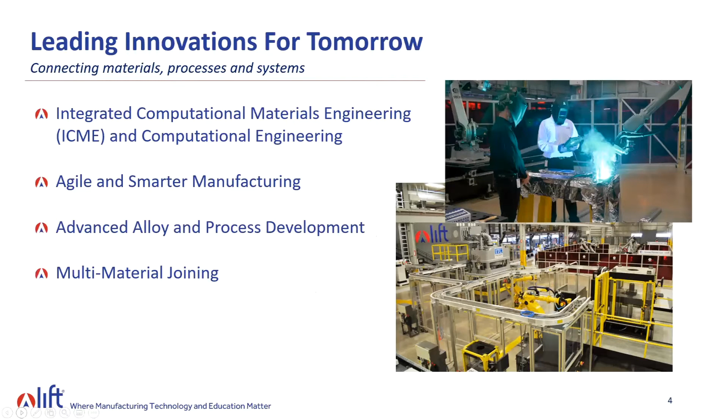So we have two programs at LIFT tackling this. The first is our technology program called Leading Innovations for Tomorrow. The second is our talent program, Learning Innovations for Tomorrow. We'll get into both in just a second. Leading Innovations for Tomorrow is the technology program, where we are doing the work of connecting materials, processes, and systems via these four pillars that you see on the screen here. This is where most of our work resides, from digital analysis and computation to actually doing the work of joining and developing products and implementing them into the systems.

On the talent side of the equation, Learning Innovations for Tomorrow, we are innovative there as well, creating new tools, pathways, and venues. It really revolves around our Ignite Mastering Manufacturing curriculum that we developed with funding from the Department of Defense, to help expose high school students mostly to the world of advanced manufacturing, because we want to make sure the pipeline of talent for advanced manufacturing in the future exists and is robust.

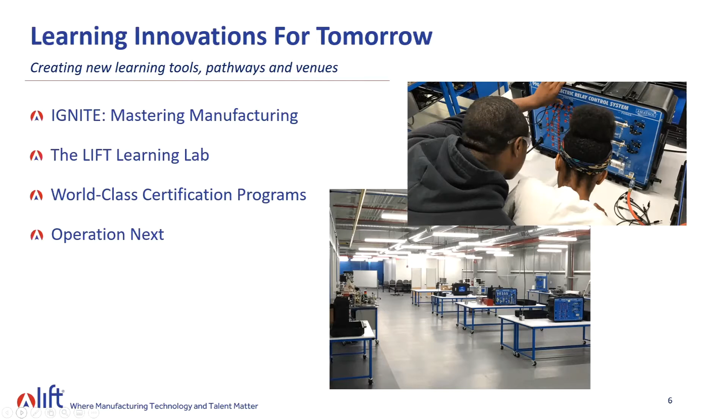We know there is a skills gap where 2.4 million jobs over the next 10 years will go unfilled because there are not enough people to take the jobs that are available or will become open over that time. So we want to make sure we are encouraging folks to look at advanced manufacturing as a career, and we do that in our facility at our LIFT Learning Lab that you see pictured there. Pre-COVID, we had about 120 students any given day coming through our facility to learn about advanced manufacturing or take part in our world-class certification programs. We are certifying people for jobs of today. We are concerned about the jobs of the future, but we are certainly working to help folks find the jobs available today in welding, CNC, robotics, industrial technology maintenance, which takes us to Operation Next.

Operation Next is one of the programs that we are most proud of here at LIFT.

It started as a program to help our separating servicemen and women who are leaving the military. Six months before they leave, it gives them the opportunity, while still on active duty, to earn certifications in some of the most in-demand advanced manufacturing jobs: welding, CNC, robotics, etc. That has been successful, and we are working towards expanding that across the country.

We have funding from the Department of Defense to do just that. It launched as a pilot back in 2018 at Fort Campbell, Kentucky, but has since expanded to the Michigan National Guard, and their spouses can take advantage of the program, as well as the Florida National Guard and Reserve and their spouses. We are looking to make some announcements coming up still this year about more defense facilities where this program will be expanded.

It also was expanded into industry in response to the COVID-19 pandemic and the CARES Act, which was funded and passed by Congress and signed by the president last year. We are piloting taking it into industry here in Detroit, as well as Pittsburgh, to help displaced workers and small to medium-sized manufacturers get off the mat, if you will, after the pandemic and really regain their footing as the economy recovers.

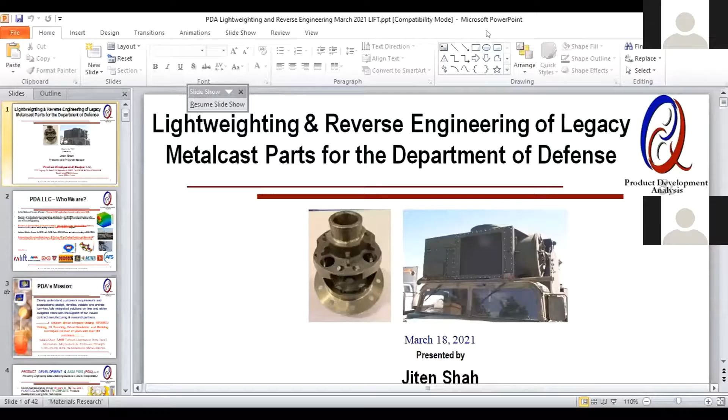Great, can you see it okay? Yes, we got it, thank you.

Excellent. Yes, hello everyone, good morning or good afternoon depending upon where you are. I'm Jiten Shah, founder and president of Product Development and Analysis, PDA LLC.

These two topics, lightweighting and legacy parts—I liked what Lift calls them, the orphan or the obsolescence—these are the two top priorities of the Department of Defense, mainly for sustainment and operational efficiency. We have done extensive work in these two areas, so I thought we would share and trigger some interest and some provoking thought process.

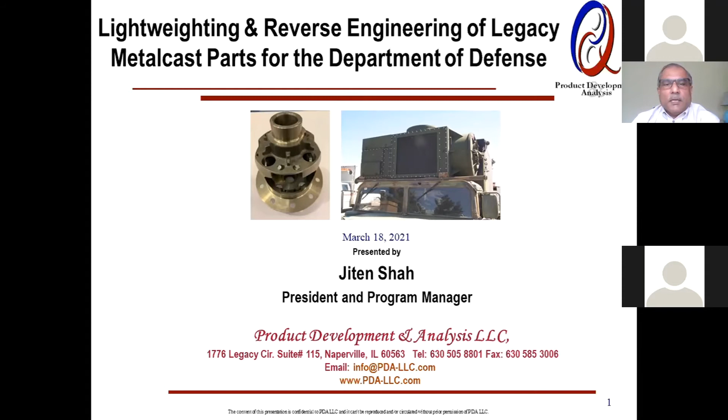Quick background on PDA: we have been serving metal casting since '93, over 27 years, with over 165 OEMs and casters in military and transportation. In addition to Lift, we have been a member with contract research projects with America Makes and MXD.

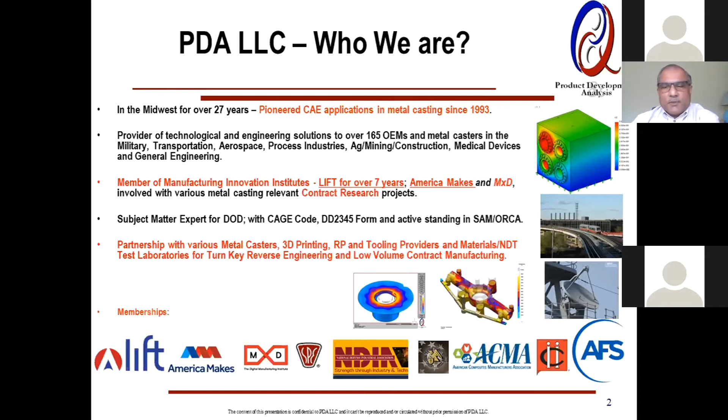And we provide a turnkey solution. We are widely engaged with professional societies like the American Foundry Society and the Investment Casting Institute. What we do is clearly understand the requirements and expectations and come up with a fully integrated solution, essentially utilizing state-of-the-art technologies, whether it's virtual simulation, ICME, 3D scanning, or additive manufacturing.

We have also done quite a bit of conversion for the lightweighting objective, converting a lot of fabrications and forgings into castings in different alloys. And I was just adding up—I think we have added over 3,000 tons of castings to the casting industry.

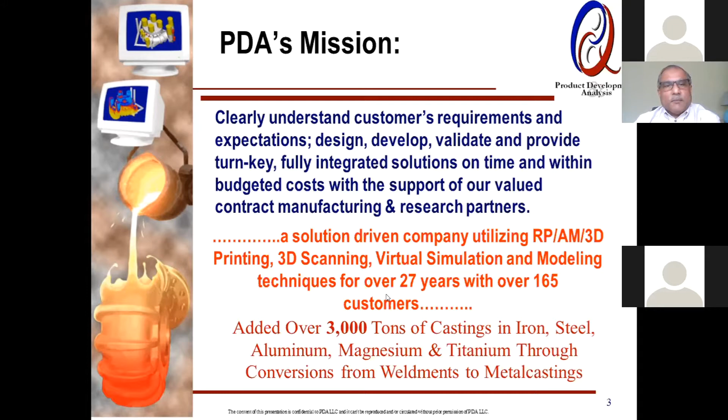In addition to metal, we also do plastic composite and essentially new product development, reverse engineering—which is what I'll talk about—redesign, and we do get into some failure analysis, which leads us into reverse engineering. I have a couple of case studies on that.

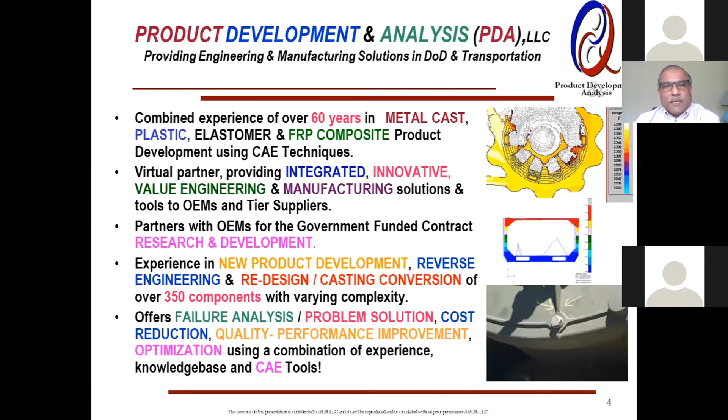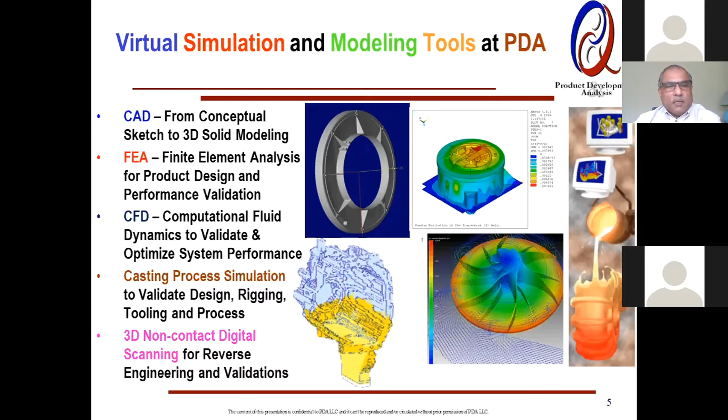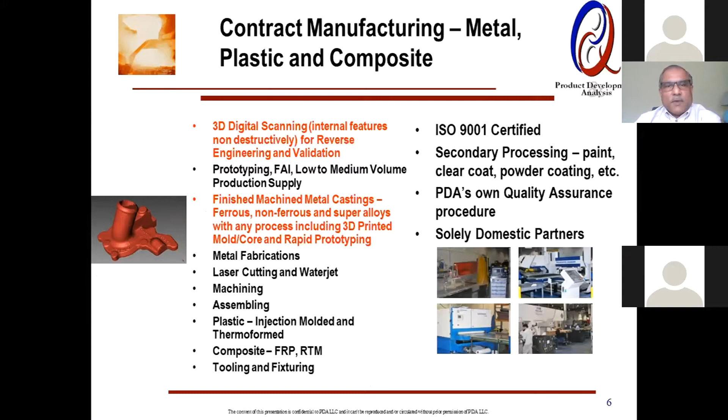In terms of tools, we have obviously a couple of CAD packages, FEA, quite extensive CFD, and our core competencies on casting process simulation, which I'll dabble a little bit deeper into, and then 3D scanning, non-contact. And as I said, we do turnkey, so we do contract manufacturing and provide components—you will see that too in a minute.

I've been involved in new product development using either rapid prototyping or additive manufacturing. Another thing I'd point out here is we extensively work in a collaborative environment. We are not the manufacturer, so we have partners we work with, and our OEM customers, we all collaborate, go through negotiation, keeping our ultimate goal in mind, which could be either weight reduction.

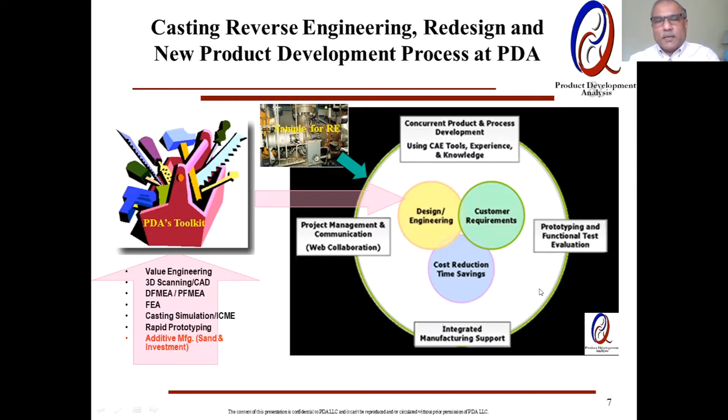Typical inputs we get, the key ones are the customer requirements, goals, expectations. In case of reverse engineering, we get a sample which could be broken or brand new, and that becomes our input, and we get into developing the shape, optimizing the shape, and developing the risering and the gating, the whole plumbing system, simulating with process parameters in mind applicable for that particular component.

And then after we have met our targets, we get into launching and deploying the technical data package, which could be the 3D models, drawings, and a bunch of reports.

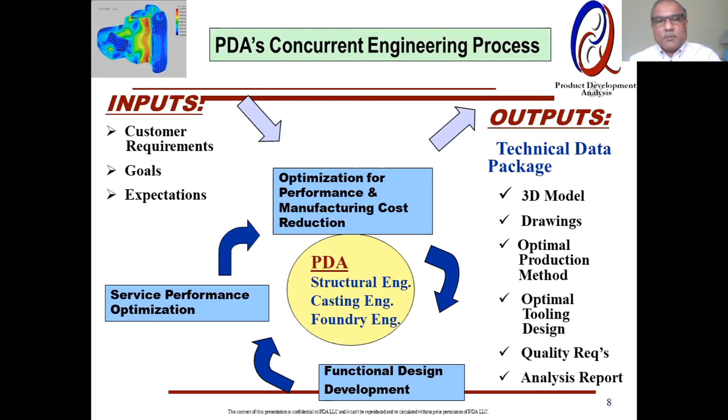This is our core competency, metal casting. That's how I started the company in '93. We have tremendous experience and database for various processes and alloys, as you can see here, anywhere from titanium.

We did for Rock Island Arsenal, investment cast for aerospace, to a stationary power generation oil pan about 12 feet long, a huge component, and some valve bodies for naval or marine applications.

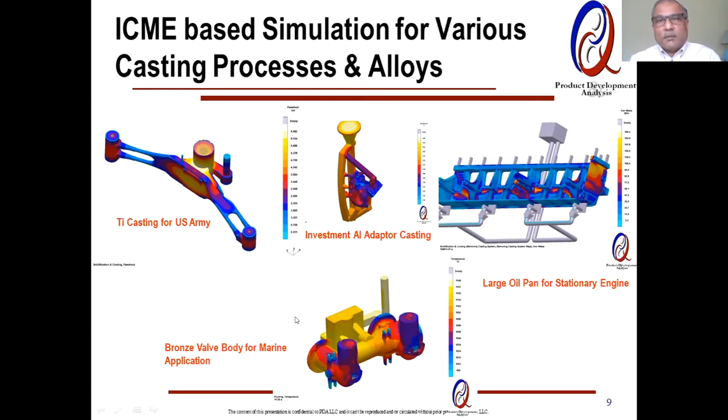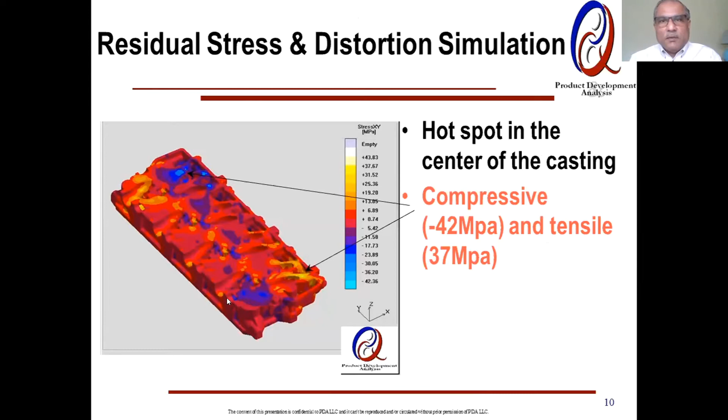When we talk about advanced simulation capabilities, the technology really comes in handy, especially when dealing with lightweight, thin wall components. There's always a concern with distortion and the buildup of residual stresses. So we have that capability, and we've done a series of projects.

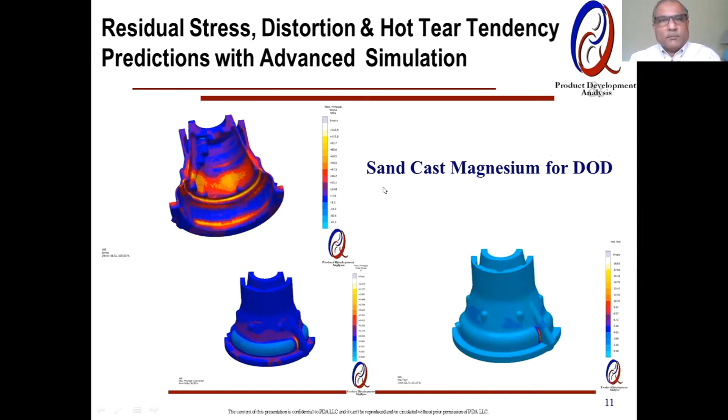This is an example of a magnesium housing for an aircraft gearbox. So lightweighting essentially is for improving the performance, efficiency, or payload, and has tremendous applications.

One I would consider is while you're at the new product development stage. In the old days we used to design quickly and then come back and optimize. Well, now the trend is to do your best right from the get-go and go through design optimization before you launch a new product. So lightweighting related technologies are quite important.

And then obviously redesign, reverse engineering for optimizing the performance. And I folded my conversion scenario under reverse engineering or redesign, kind of a subset. And also conversion as a separate topic, mainly driven from the cost reduction point of view and supply chain issues.

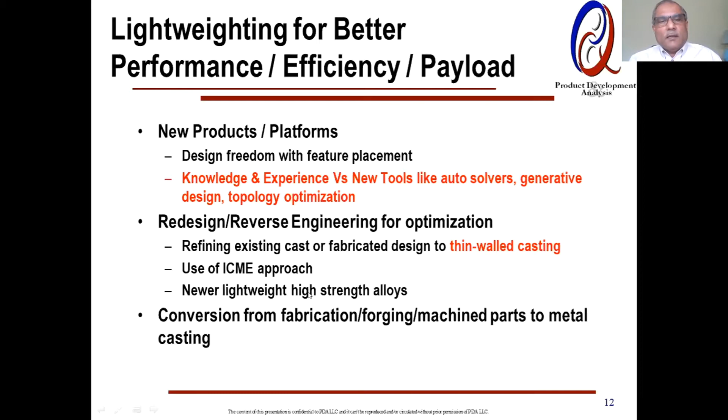We've seen quite a few examples where long lead times and the supply chain drying up necessitated looking for an alternative method, and we've converted quite a few with that.

This is one of the flagship projects I happened to be part of, where we took a legacy part used by an OEM in service for over a decade or so, and using the new alloy we developed, with design optimization, we were able to knock 40% of the weight out, and went through the whole prototyping and PPAP, low volume production, in order to get the durability testing.

We used generative design, auto topology optimization. I'd say very powerful tools, very useful to see which areas you can take the weight out. But the caution is you don't want to straight away use those outputs to try to make the castings, because you'll never be able to manufacture those consistently. So there has to be some design for manufacturability consideration, along with virtual simulation, to validate and come up with more manufacturable solutions.

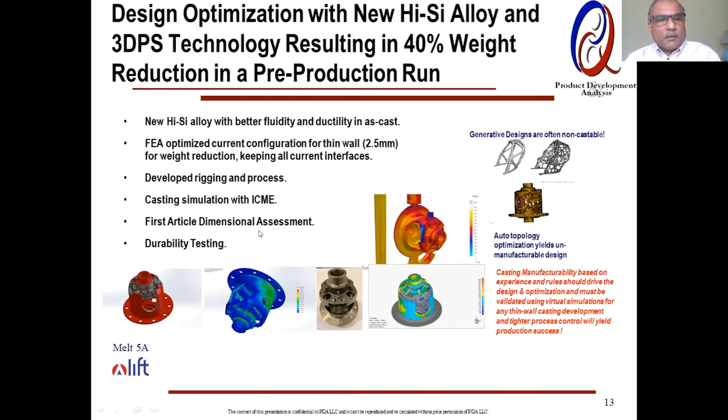The next project I was involved in was thin wall aluminum casting. These are the first 4 or 5 projects LIFT rolled out in the very first year of their existence, and we were fortunate enough to be part of it. This was led by Boeing, and it focused on thin wall casting development for aluminum alloy using high pressure die casting with a super vac.

We took a part which is the side impact beam of an automotive company, about 1.2 meters long and 3 millimeter wall. In some areas we had almost close to a 1 millimeter wall, and it was a challenge to come up with the process parameters and the gating system to make sure it fills without any hot tear or porosity in the critical areas.

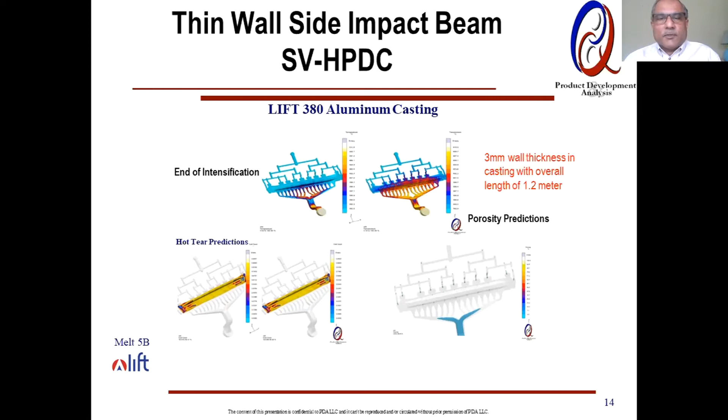So we were able to successfully simulate, and Boeing went back and validated through extensive X-ray, and they found a sound component. Also, because we were working on a new alloy, we designed and developed a fluidity die working with the Ohio State University team, where we ran trials and validated and calibrated our simulation by running partial shots in the die cast.

One thing I do talk about is what I've seen in the metal casting industry: over-specifying the component by saying, hey, I want the entire casting level 1. When you do so, you really pay a price because it's very difficult to manufacture consistently to level 1. What the suppliers end up doing is basically doing a weld repair if it's a weldable alloy, or if it's not, you end up having a high scrap rate, and ultimately the OEM ends up paying for it.

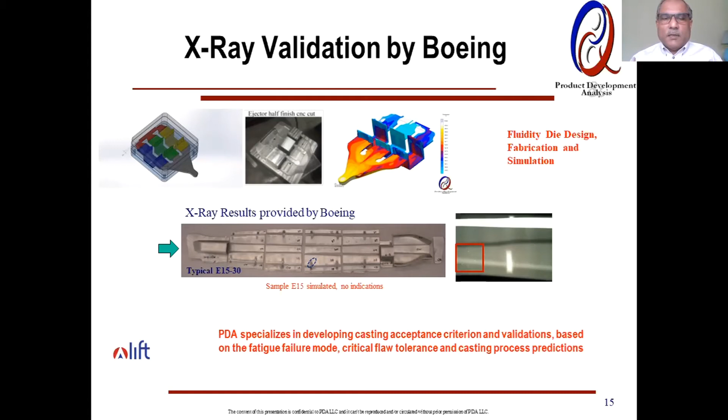So what you do now is have a casting with zoning, with different levels of severity for different types of defects. Now you are giving something to manufacturers that they can make cost effectively and consistently. So I just wanted to dwell a little bit on that.

Another exciting development, which fits in very well with reverse engineering and legacy part production, is the availability of tooling-less casting processes, using additive binder jet, where you straight away make the mold and core, or make wax-like patterns, and then do investment casting.

What we have done with this technology is literally take the tooling-related design, fabrication, manufacturing time and cost out of the equation, and the subsequent headaches of storage and maintenance of the tooling.

That's one of the key issues that the DoD, and especially DLA, runs into: they have contracts for acquisition by contract. Supplier A finishes the contract and the tooling is owned by the government. That tooling either ends up at a government depot not well maintained, and when the next order comes, they cannot find the tool, or it's been damaged because nobody really took care of it. So this is part of the issues we have with legacy part acquisitions in the DoD, especially in the DLA.

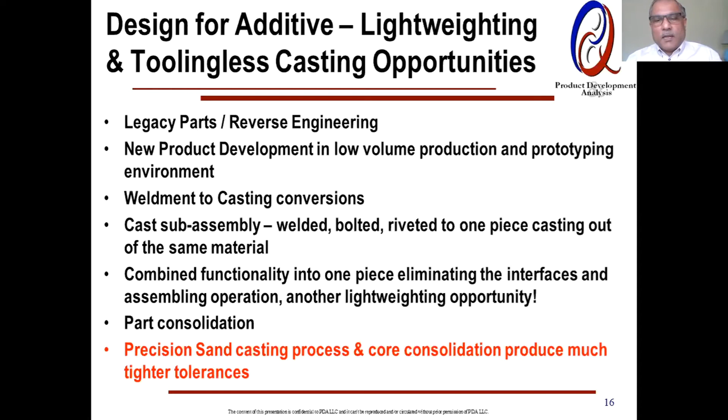Another thing we've seen with additive, especially 3D printed sand, is that these are digitally made, so there is no tooling wear and tear. Every time you make a mold, it's dimensionally accurate with a precision of maybe 0.5 millimeter. So I call it precision sand casting, because it really helps you further narrow down your tolerances, make the walls thinner, and get the light weighting.

I'm sure most of you are aware of the process, so I'll just zip through. This is making, 2-in-1 I call it, making mold and core out of the same machine without any tooling.

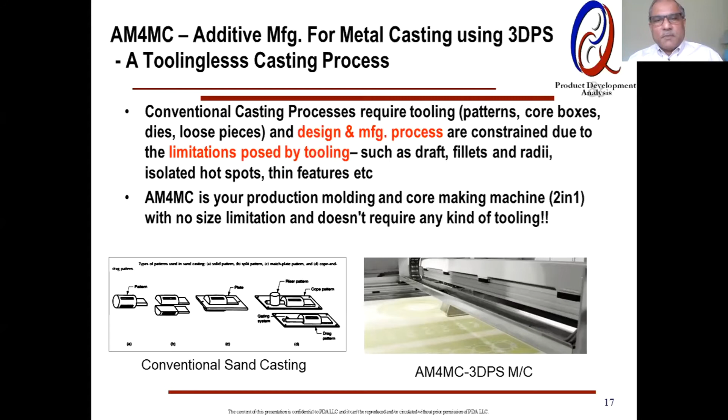On investment casting, you can see an example of a printed wax pattern that looks like an exact replica of the casting, but you are eliminating the need for wax injection dies. As the photo indicates, the storage, maintenance, and upgrade—all that logistics—is really gone out of the window.

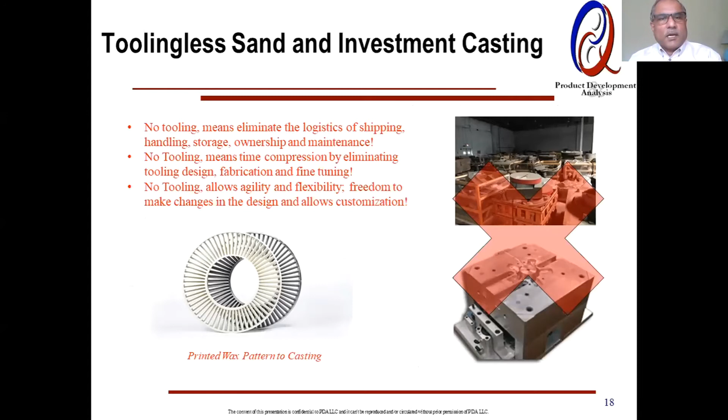One thing you also gain, since there is no tooling with this digital manufacturing, is there's no need for drafting or constraints by drafting. So it gives a lot of freedom with feature placement. You don't have to worry about withdrawing the tool out of the mold since there is no tooling, and that gives you additional advantage of putting features where you want, and gaining lightweighting and optimizing the design further.

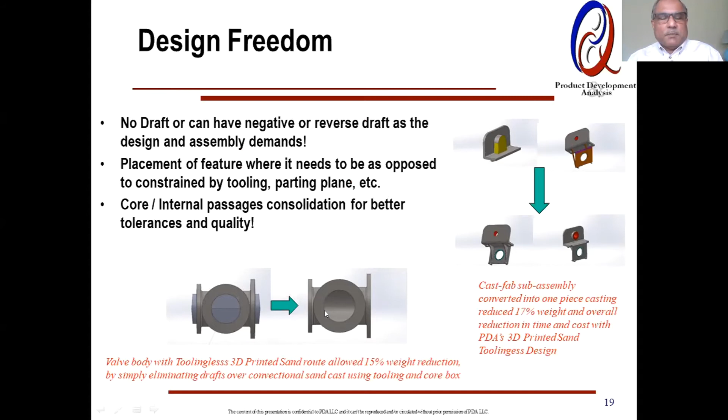Here is an example of a cast-fab sub-assembly on your right, converted into one-piece casting with a 17% weight reduction. And the one on the left, by just simply removing the draft, we were able to get about 15% weight reduction.

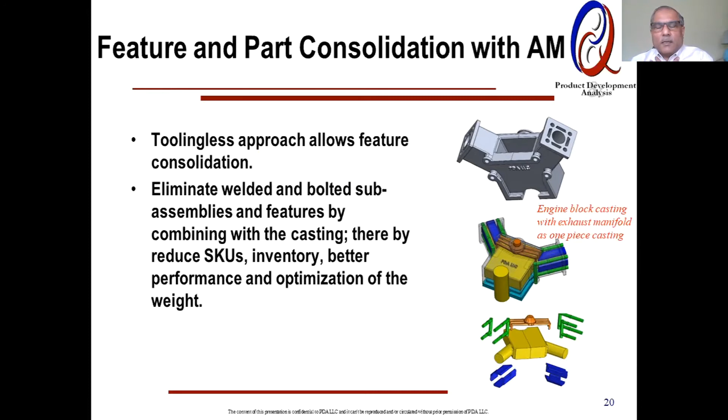Also, you can think out of the box, where you look at the current casting and how it is connected—either bolted or welded—and you can bring those features together as long as it doesn't interfere with your assembly. This gives you an opportunity to consolidate multiple components into one piece casting. For example, we worked on an engine block for a racing car where we combined the manifold with the block, coming up with a design which can only be done with this approach.

The differences here with additive manufacturing—we just have the z-axis orientation. You have to make sure your part or design is oriented properly, because otherwise you'll see a staircasing effect, since this is a layer by layer process: binder jetting.

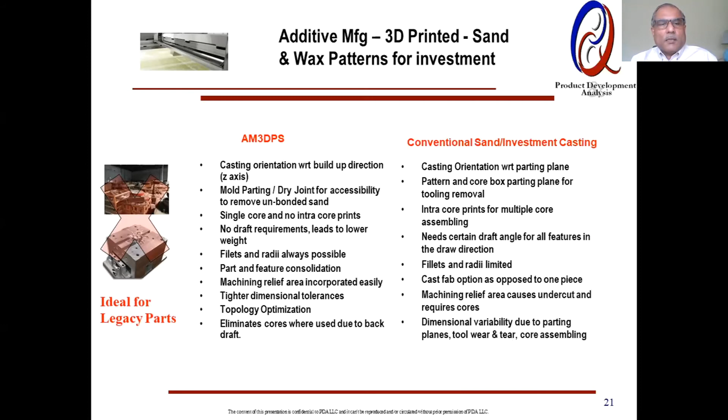It's really ideal for legacy parts. This is an example from our America Makes project with our partner Humtown, acknowledging their case study, where we took multiple cores and came up with a one-piece core design. You can imagine the positional tolerances are going to be right on the money, as opposed to the traditional approach where you may see some sloppiness because of core print clearance. This definitely gives you much better dimensional accuracy and reproducibility.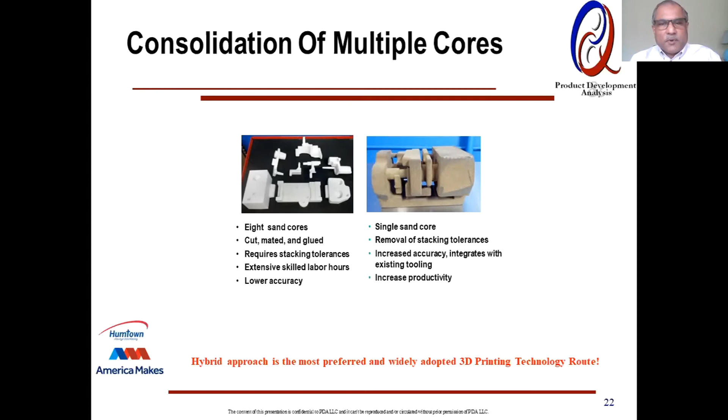Another example: core consolidation for ductile iron. This is another lift project, investment cast, where we worked with Lockheed Martin. This resulted in tremendous improvement in fatigue performance.

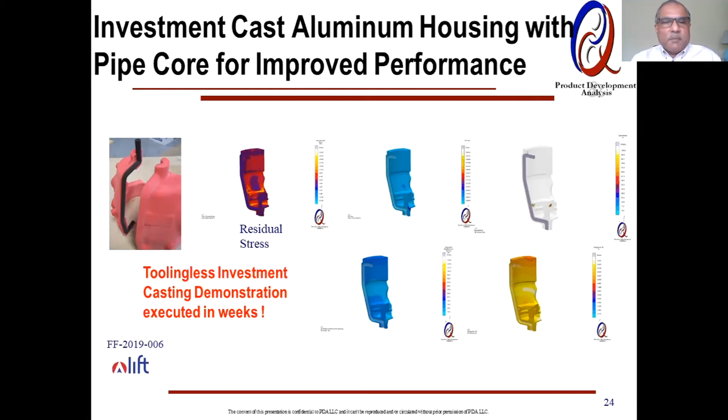Switching gears here to reverse engineering. When we do reverse engineering, typically we get new or used samples, and we always ask for access to the higher order assembly, so we know the interaction of that particular piece with other components.

Typically we scan—we have an in-house white light scanner, but we also have access to a CMM portable probe with a laser scanning attachment. We also get 2D drawings, old watermarked drawings that we can take and build into a 3D model, and then the deliverable would be a 2D drawing with engineering tolerances and fits. That's a very important area in reverse engineering, because you don't have access to the design engineer who designed this, and you have to engineer and come up with the tolerances and fits.

And of course, we then determine material quality assessment through FEA or hand calculation. We determine the critical areas and features and develop the requirements, and now you are getting ready to make castings and do the secondary processing.

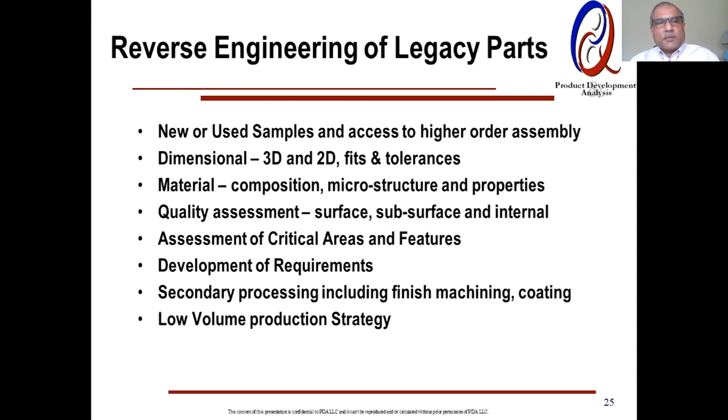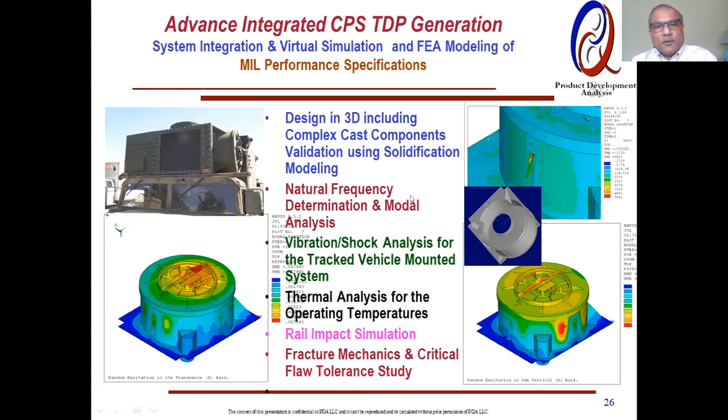This is an example of a collective protection system, Humvee mounted, that I was involved in—reverse engineered all the aluminum casting components. We had to go through extensive design validation, come up with the requirements, and deliver the data package to the Department of Defense, which they used for acquisition and sustainment.

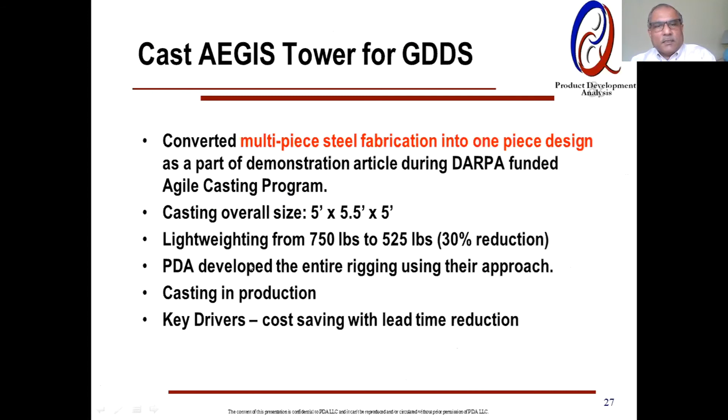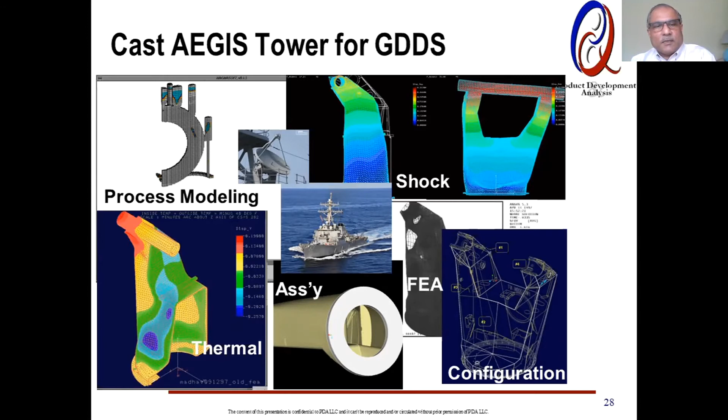Another project that comes to mind: we converted a steel fabrication into a one-piece casting design and achieved 30% weight reduction, with tremendous savings in cost and lead time. This particular component is actually still being used on the destroyer Aegis—that's the targeting radar antenna dish and the structure we designed. It's about a 5 cubic foot envelope, a pretty big sand aluminum casting that had gone through extensive FEA, rigging, and process simulation.

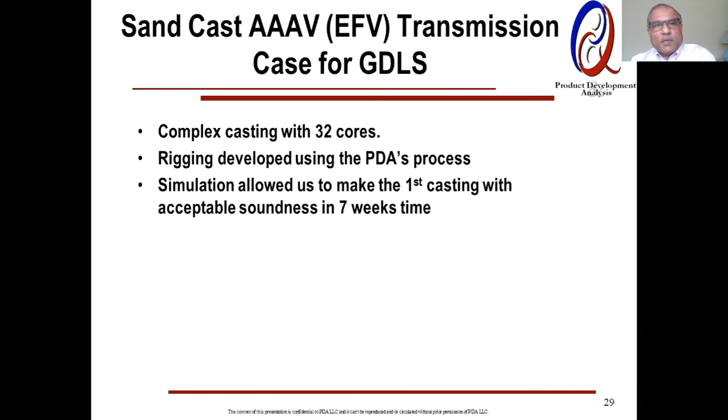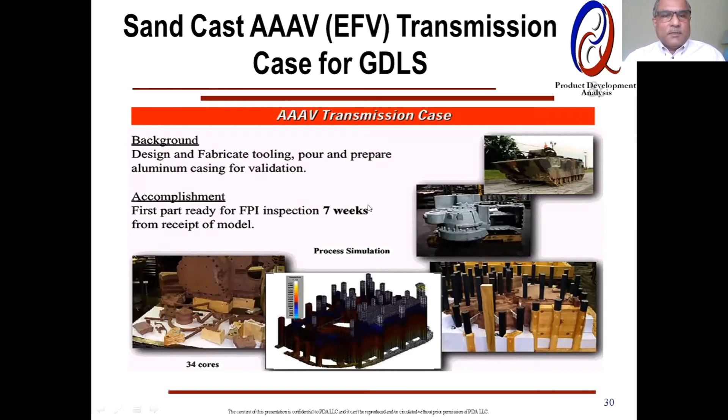Another one is the transmission housing for the AAAV, which became the expeditionary fighting vehicle, and we were involved in its development. This was more of a new product development project—their design configuration wasn't manufacturable, so we helped them and turned the whole thing around in 7 weeks from the time they gave us the model.

I have also converted 500 and 2,000 pound projectiles, which used to be made of steel, into one-piece castings, which turned out to perform better with improved fragmentation and footprint.

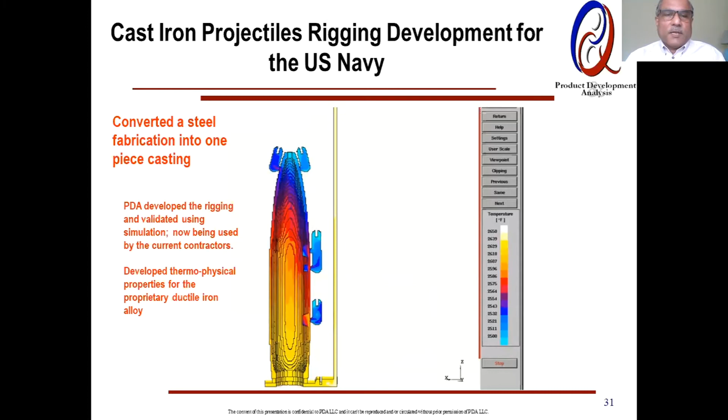These are being used in the current theaters, or were used in the past. Another example for General Dynamics Defense, for a submarine, we took a component and converted it.

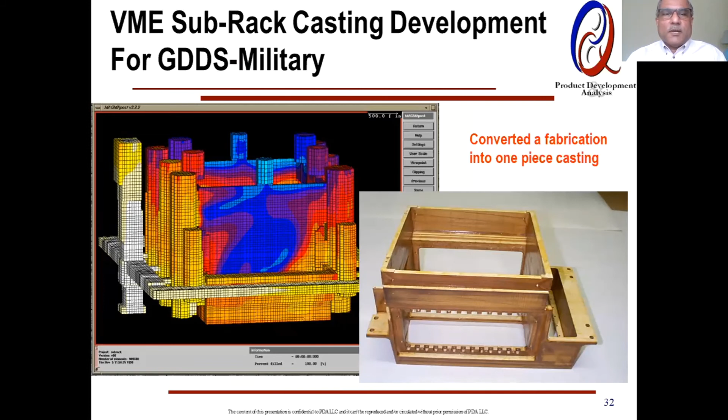A good example to share: a leading food processing company had a failure of a pump for their boiler feed water in their captive power plant. We did the failure analysis, found out what was wrong, and casually asked if they needed help replacing these components. They said they'd get back to us. They tried to reach the original manufacturer and supplier in Europe, but they were out of business, and the client got into a panic before winter hit.

They really wanted to get the captive power plant up and running, otherwise it would have cost them on the order of $10,000 a day. So with this kind of project, when you find a solution, the payback and value proposition is tremendously appreciated.

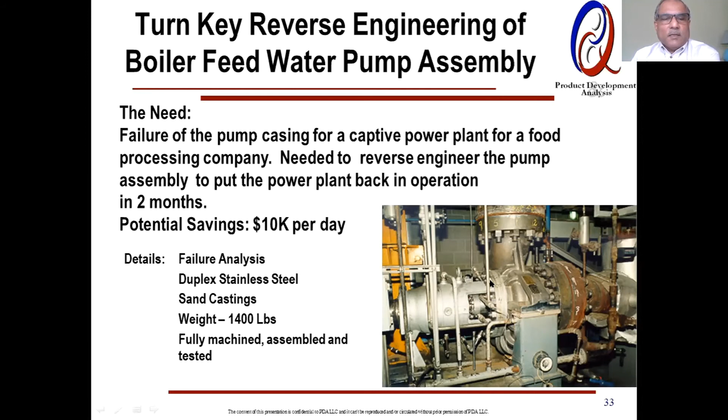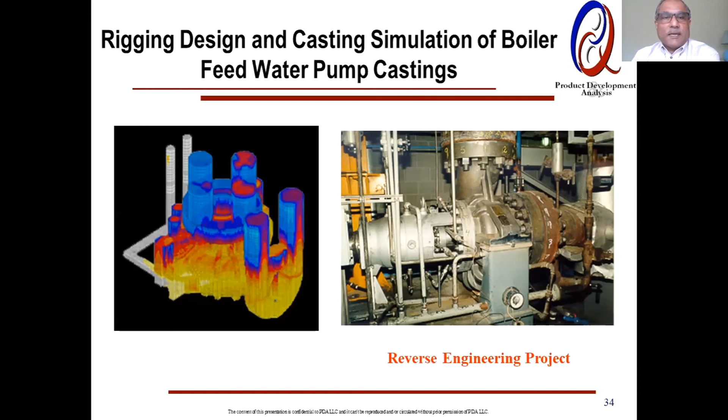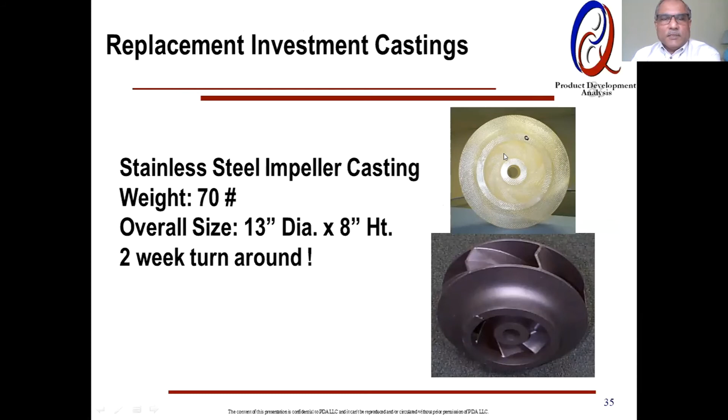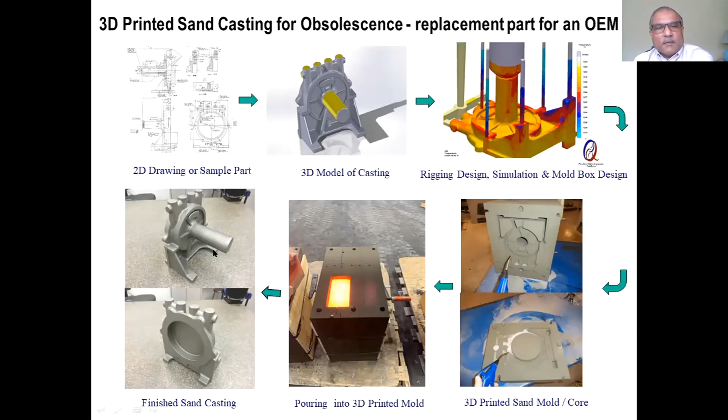We've done quite a bit of work on investment replacement castings using an old technology, SLA, to make the casting. We did this for a locomotive OEM as a replacement part. They needed just one for a locomotive built in the 1950s, and all they had were hand-drawn drawings. We took that and a sample, converted it to a 3D model, used a 3D printed sand mold, poured it, and supplied just one piece.

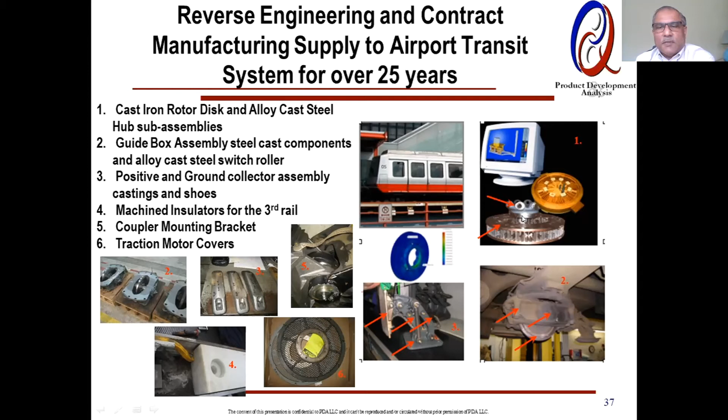For reverse engineering, we have tremendous background in military as well as transportation. This is a people mover system I've been involved with for over 25 years, with multiple components, predominantly castings, starting with the brake disc rotor to the whole guiding system to some composite panels.

This is a classic case where most of the time we get a used component, and we reverse engineer it, taking into account wear and tear, develop the dimensions and interface, and do testing and validation, because this is for carrying people. A lot of these are safety critical components at very low volume, so big companies aren't interested. This is our sweet spot, and we've been serving them still.

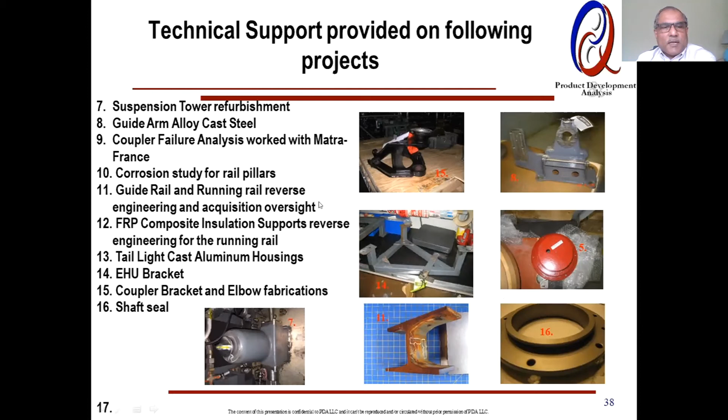Another reverse engineering project we've been doing for almost 15 years: high-speed rail interior. The key here is that when the OEM built those high-speed trains, they had enough volume to justify using a high-pressure die-cast process. But now the client was looking for replacement of like 10 or 15 pieces, and there's no way to justify the investment of high pressure die casting.

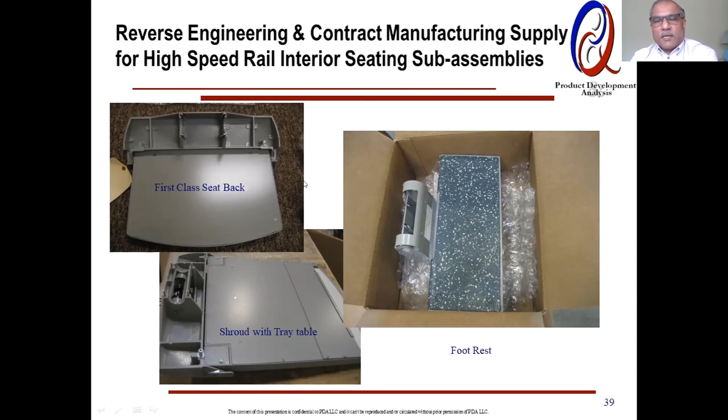So we redesigned and reverse engineered it to sand cast with a combination of machining, giving a cost-effective solution. This is actually for the San Francisco trolley.

Interesting scoop on that: the mayor really wanted to keep those trolleys working and operational because that's what visitors think about, taking a ride on the trolley system. So we worked with the leading company that does all the refurbishment, and we reverse engineered the traction motor housing and both ends, the commutator end and the pinion gear end, and end cap castings, delivering a complete solution to them.

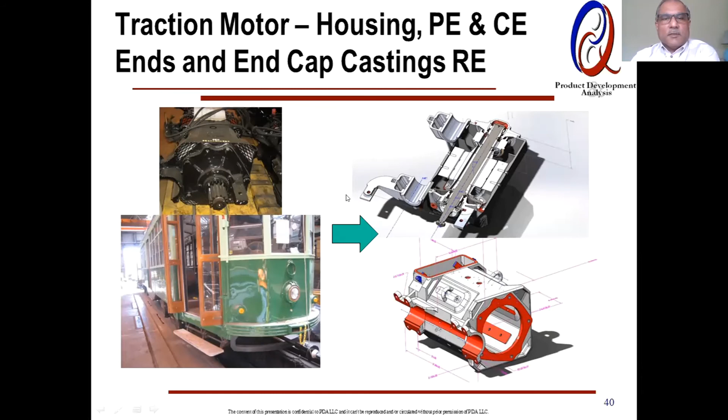We use traditional methods as well as scanning to build the model. When you make the model, you make castings as well as finish machine, so 2 models. Then we go through casting analysis, develop the riser gating, do FEA so I know which are the critical areas, develop the acceptance criteria, do the acquisition, get it machined and powder coated, and supply. We have quite a few examples of this.

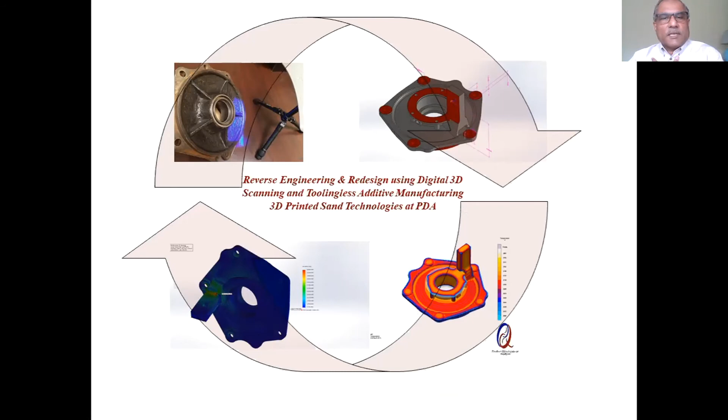I think at this point I would let Joe take some questions the audience may have. How do we handle that? Do I give the control back to you?

Yeah, that's a good point. Actually, a lot of that is happening. Politically, if you look at the current administration, they've put a mandate on material solutions, because we have tremendous vulnerability. For example, rare earth materials - we're in a situation where we don't have access, and it's controlled by our so-called adversaries. The government is willing to do tremendous R&D to find new alloys or solutions like E357.

There's a lot more work going on in magnesium and aluminum non-ferrous alloys, including some super alloys I'm involved with, like Haynes 282, which has excellent elevated temperature creep properties. But these are material solutions needed because of supply chain issues for sustainment.

So I'm glad you brought it up, Tom. And on that E357, I should mention that we included a bunch of materials into MMPDS, which is the old mil handbook. That used to be our roadblock, because the military engineers, when they design something, that's their Bible.